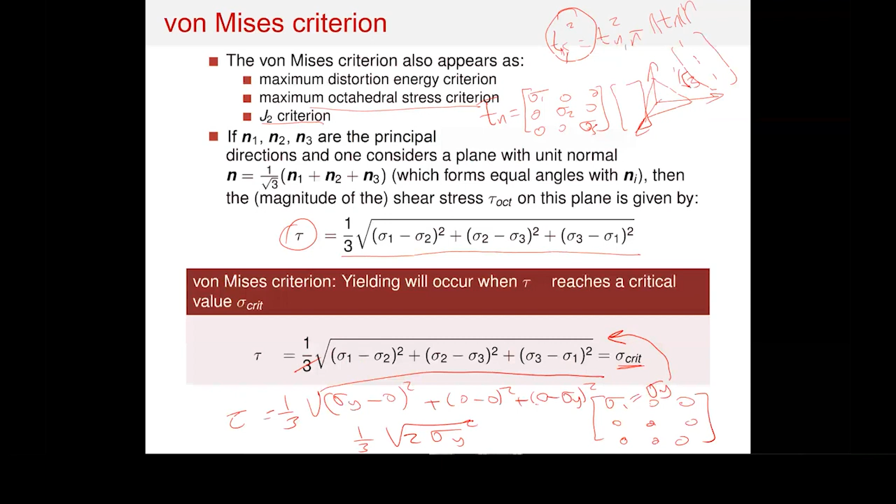So the critical number will need to be equal to that. And if you go back to the equation and you take the square of this, the square root will go away and you have 3 squared. You cancel the 3 with the 3, and the square root and the 2 will cancel with the 2, and you will be left basically with this one here. Yes, so you'll be left with this equation.

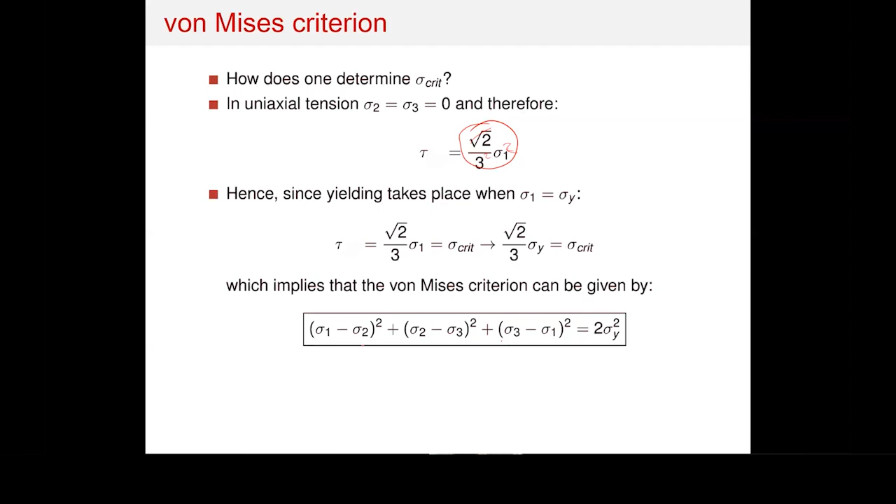So if you square the right-hand side and you square the left-hand side, the 3 will cancel with the 3, and you will be left basically with this equation. So for the von Mises, you can just compare sigma y squared to the difference between the principal stresses being squared. Okay, so this is the equation for the von Mises, and we are going to solve some examples on that as well. Again, if you look into this equation, you would see that it is only the difference between sigma 1 and sigma 2.

So if you add P and subtract P, add and subtract, the material would never fail, and you will end up with the loophole which we have discussed for Tresca. The same problem with Tresca, you also have with the von Mises. All the criteria which rely only on the shear would face exactly the same problem. So if you add the pressure to the principal stresses, you would never fail.

However, if it is tension, it's going to fail because of the tension. If this is compression, it's going to bring the material stronger together, and it's not going to fail as quickly as von Mises would think. And if the pressure is huge, it's even going to fail due to the pressure, not the shear. Okay.

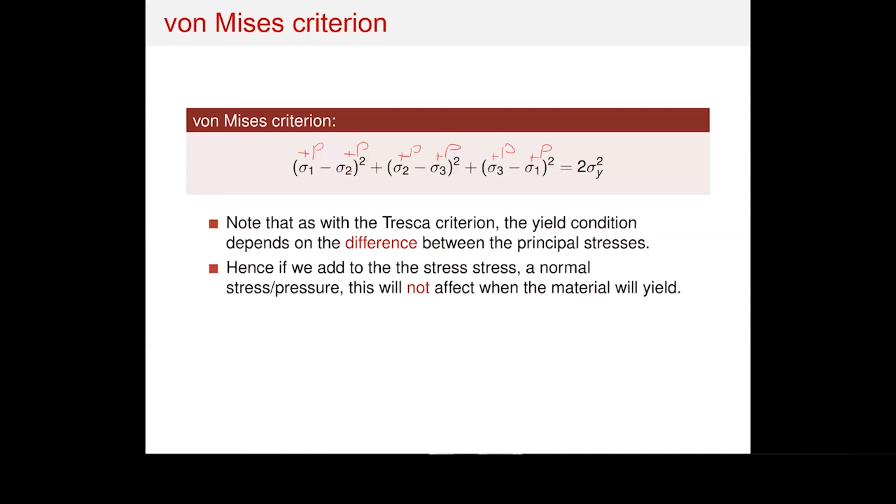So I'm going to discuss the yield phase, but let us solve an example. This example is the example which we have discussed earlier. So basically the hydrostatic pressure is minus P I. So it is P multiplied with the identity matrix. If you add this to the principal stresses, then the material will never fail. So the failure would never change if you add hydrostatic pressure to Tresca or von Mises. So this is the type of discussion that exists in this example, and this is something I've discussed already for the 2 cases before.

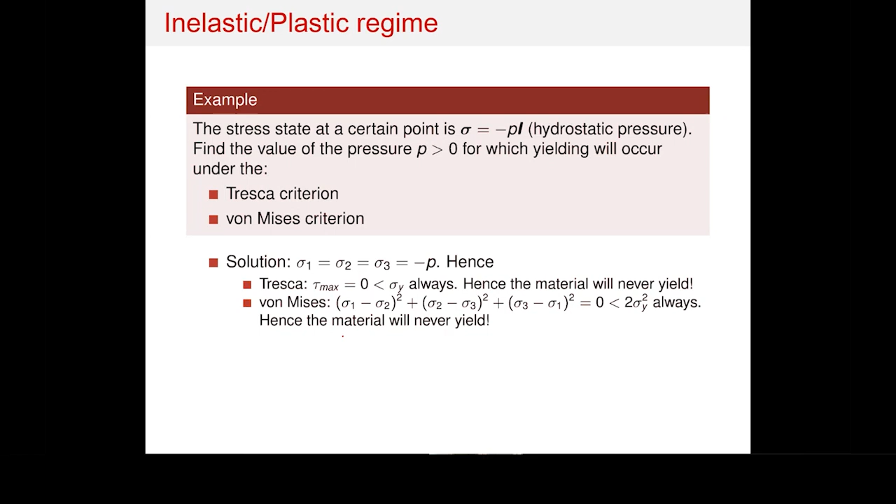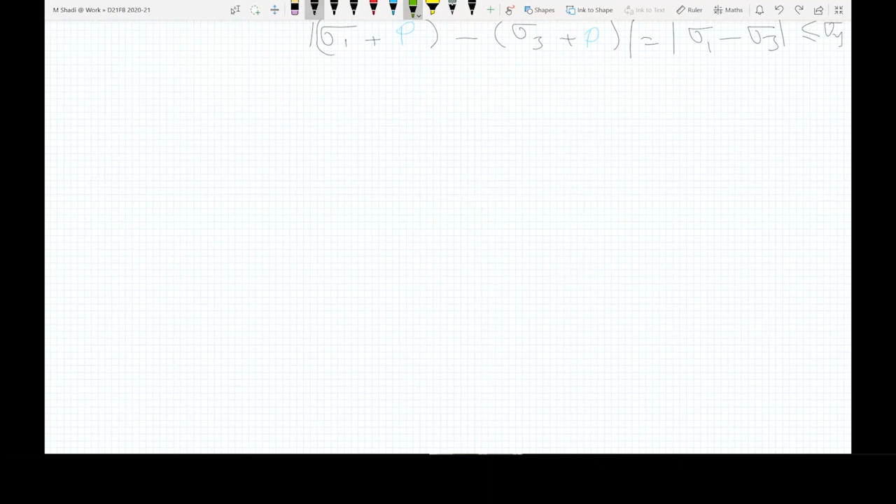Okay, so it is minus lambda, tau, 0; tau, minus lambda, 0; 0, 0, minus lambda. If you find the determinant of this and make it equal to 0, you'll have minus lambda multiplied with lambda squared minus tau squared is equal to 0. So this would mean lambda is equal to 0, or lambda squared is equal to tau squared. And this would mean lambda is either equal to plus tau or minus tau. So the principal stresses are going to be sigma 1 is equal to tau, sigma 2 is equal to 0, and sigma 3 is equal to minus tau. This is just the eigenvalue problem for this example.

Now, if you want to look into the failure criteria, for the Tresca you have sigma 1 minus sigma 3 divided by 2 should be smaller than sigma y divided by 2. And sigma 1 is tau, minus minus tau, divided by 2 should be smaller than sigma y divided by 2. Or you have tau plus tau, this is 2 tau, and 2 tau divided by 2 is going to be tau. So tau would need to be smaller than sigma y for Tresca not to fail.

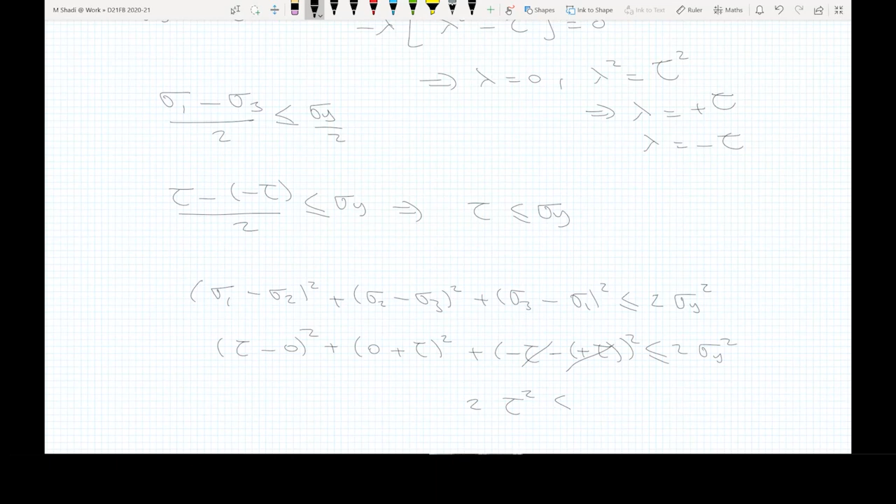If you look into the von Mises case, von Mises would take sigma 1 minus sigma 2 squared added to sigma 2 minus sigma 3 squared added to sigma 3 minus sigma 1 squared should be smaller than 2 sigma y squared. Sigma 1 is tau minus 0, this is squared. Sigma 2 is 0 minus sigma 3, this is plus tau squared. And sigma 3 minus sigma 1, this is minus tau minus plus tau, squared, should be smaller than 2 sigma y squared. This will cancel with this one, so you'll be left with 2 tau squared should be smaller than 2 sigma y squared. The 2 will cancel with the 2, and you will be left with tau smaller than sigma y.

So as long as tau is smaller than sigma y, the material will not fail. This is pretty much exactly the same as in this. And if you look into the Rankine criteria, you will also see the same thing. Rankine would only be concerned with sigma 1 should be smaller or equal to sigma ultimate or sigma y. And sigma 1 is equal to tau, so tau should be smaller or equal to sigma y.

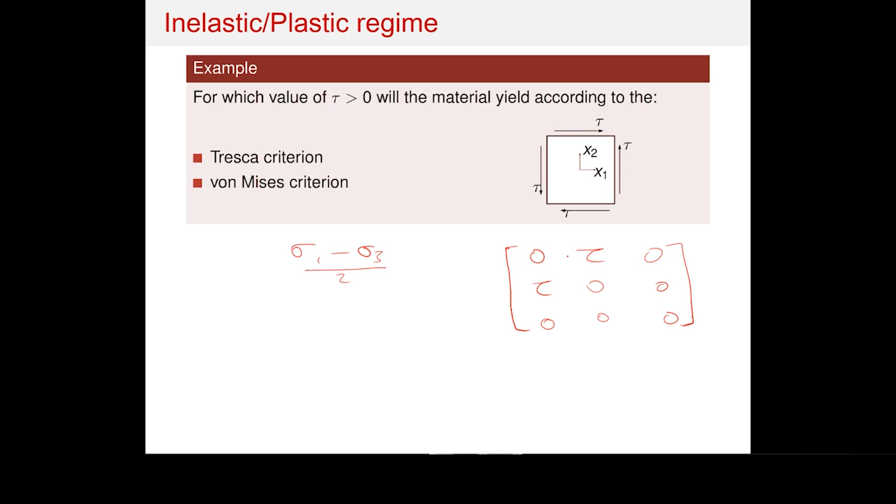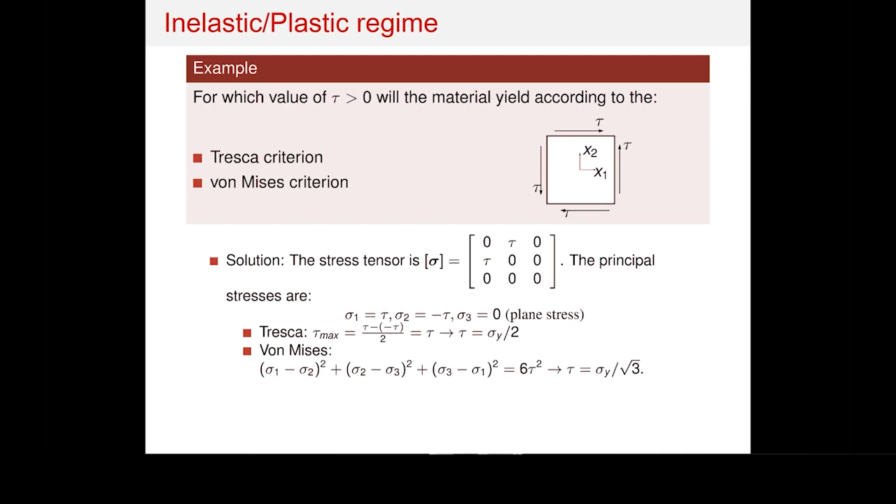So this is the question, and I have one example for you to solve. I want you to solve this example now yourself. We have the stress tensor given like this. I don't want you to go into the principal stresses. Don't calculate the principal stresses. I've given you the principal stresses here. And I want you to check the material failure using von Mises and Tresca.

So for Tresca, you need to compare sigma 1 minus sigma 3 divided by 2 should be smaller than sigma y divided by 2. And for the von Mises, you also have the equation. So this is sigma 1 minus sigma 2 squared plus sigma 2 minus sigma 3 squared plus sigma 3 minus sigma 1 squared. And if you are going to calculate the safety factor, just take the square root of that, because you cannot take the safety factor using the squares. And then you have this to be smaller than square root of 2 sigma y squared.

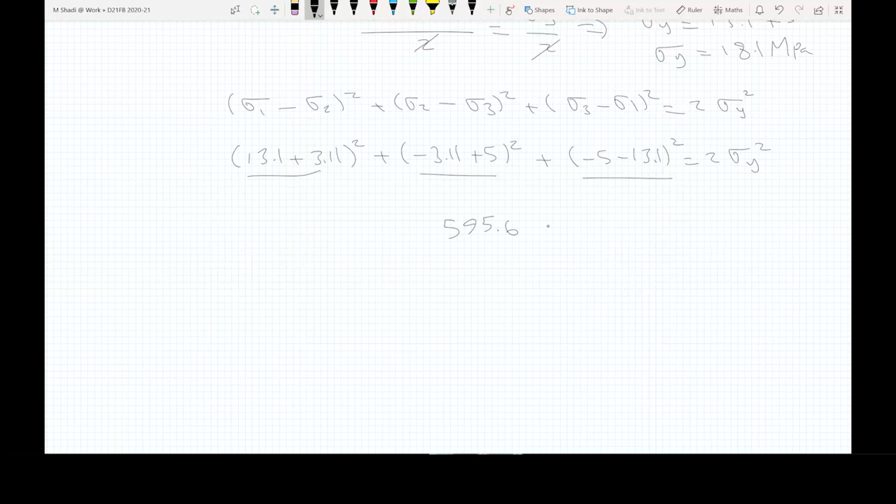So this is basically everything in there. You just need to calculate sigma y. There is a square in here. So if you calculate these numbers, this is 595.6. So 595.6 is equal to 2 sigma y squared. So sigma y is equal to the square root of 595.6 divided by 2. And this is equal to 17.3 megapascal. So for von Mises, the yield is 17.3. For Tresca, this is 18.1.

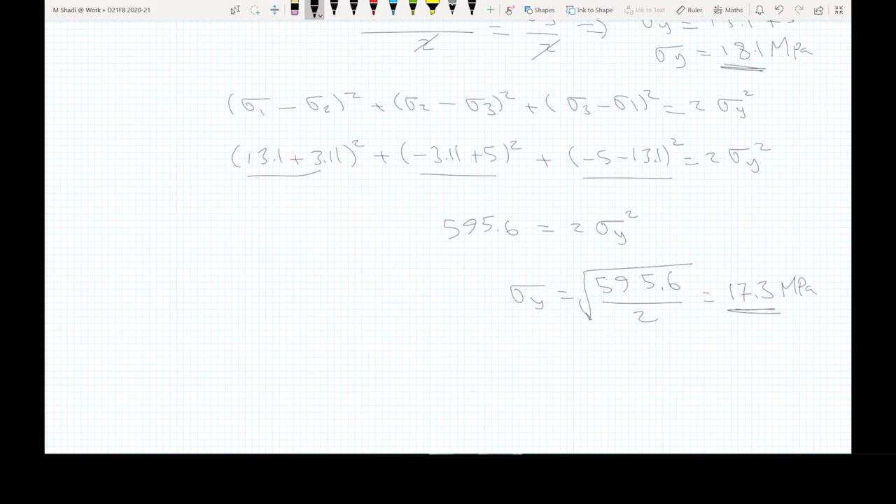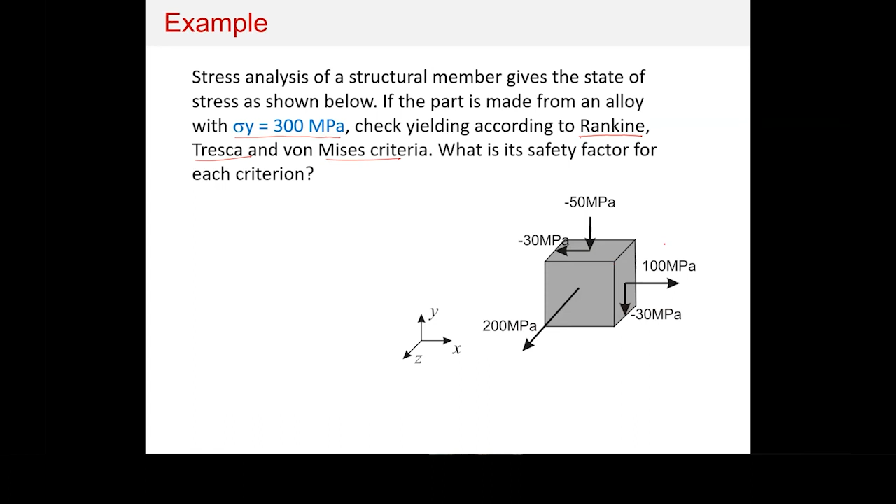All right, I've got one last example for you to solve. This example I'm not going to solve. I'm going to ask you to solve it. Evaluate the safety factor for Rankine, Tresca, and von Mises. So what is the safety factor for each one of these? The yield is 300 megapascal, and the stress tensor is given like this. This is a picture of the stresses, and this is the stress tensor, and sigma y is equal to 300.

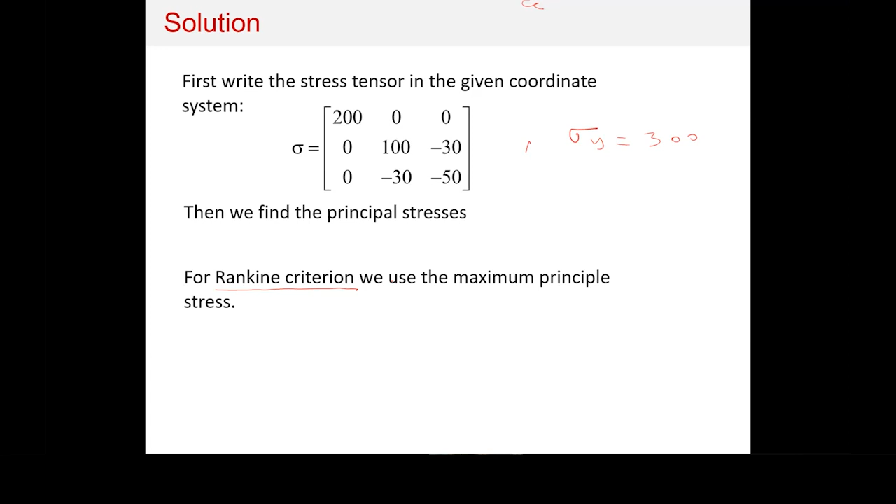So please calculate first of all the principal stresses. You need to find the safety factor for the Rankine criteria, and then for von Mises and for Tresca. So this example pretty much covers everything we have done so far in relation to the stresses. First of all, find the eigenvalues for this stress tensor. Once you have the eigenvalues, I want you to apply the Rankine, the von Mises, and the Tresca criteria and try to find the safety factor for them.